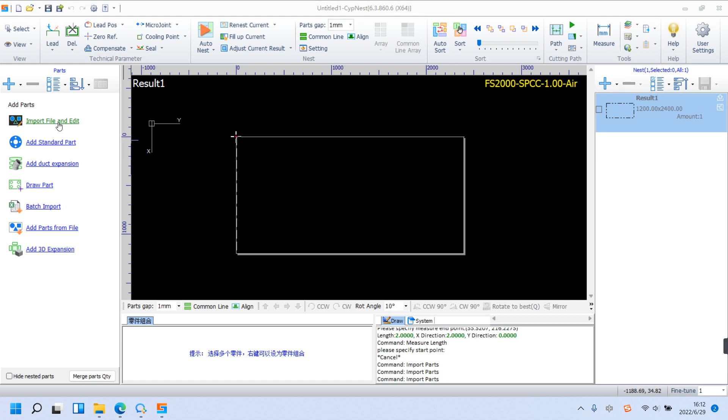Here is where we deal with files. DWG, DXF, LXD and LXDS formats are supported in CYPNEST. Mostly we import and edit parts, since we need to modify the drawing. And this is when parameters auto-optimization can be of use.

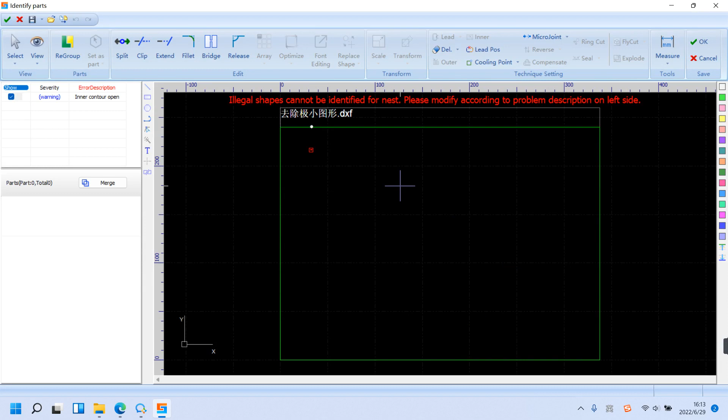Start without selecting this feature. Import the file, and we find there is a trivial line, which is, let's see, 2 millimeters long. And so we can quickly remove the unwanted line by selecting the feature as we import the file.

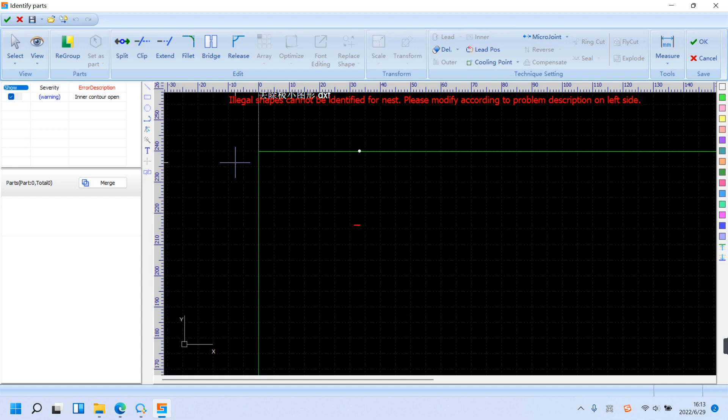So let's import the file again. Get it selected and set the trivial size as 2.1 millimeters. And it's gone. Even if sometimes they are too small to be found, checking this feature will leave you no worries. And for your information, when the file is imported with no errors identified, it will automatically turn into parts.

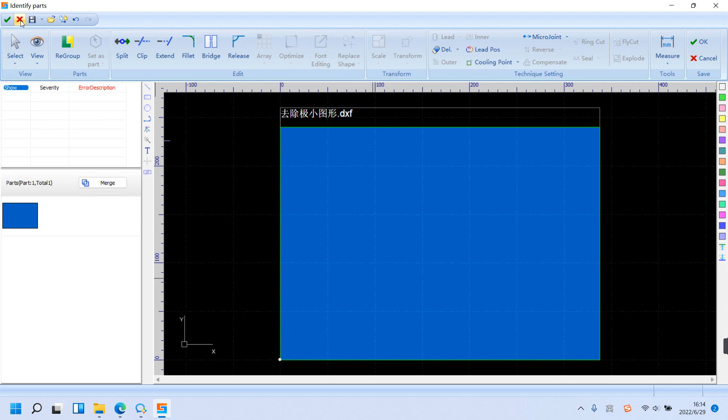The second part is mapping, which includes 3 functions: mapping by color, by layer, and their mixture. And here we also have graph replace. Generally speaking, parts have different ways to get processed. They can be distinguished by color or by layer. Let's take by color.

At first, we import parts, choose mapping by color, without any changes on how it is processed. We get a part with 2 rings to be cut, and here we also have a square. And now we import the same part again.

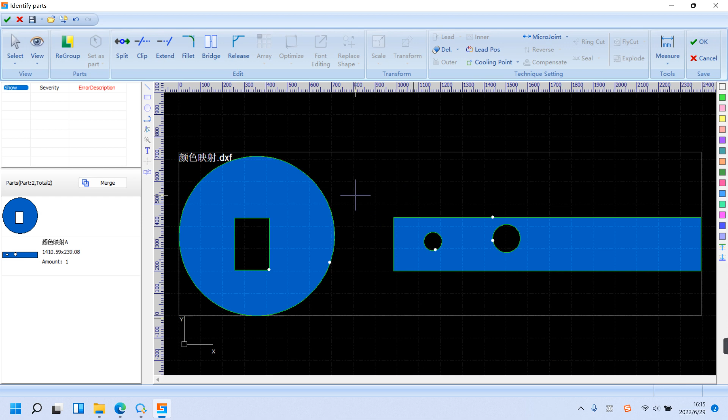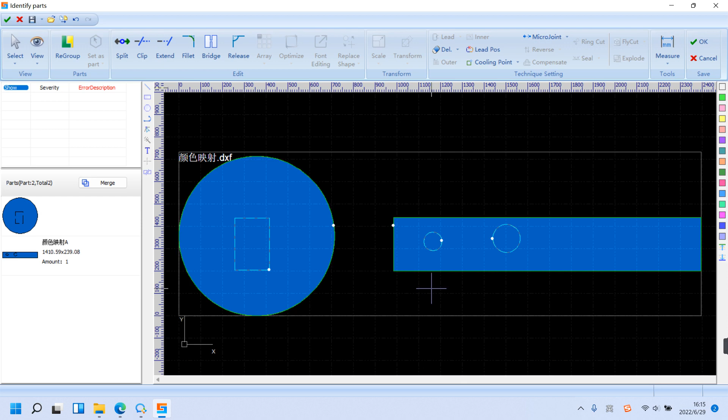With the red color set as marking. See, we got a part with rings to be cut and the square to be marked. This is how it works. The next is graph replace.

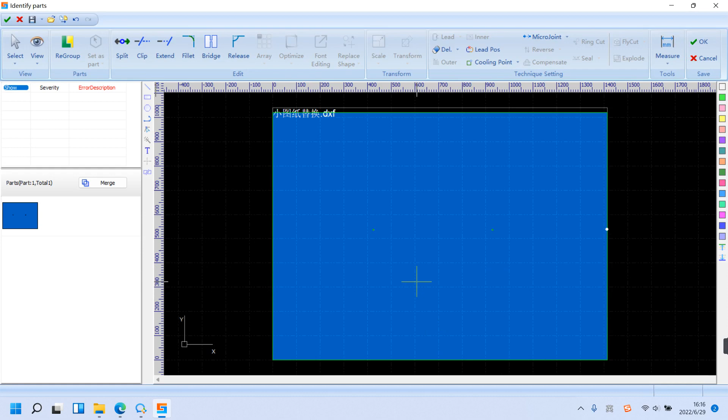In drawings, figures like small circles often represent certain marks. Also, we start with importing the file without graph replace. It's a square with 2 small circles, 10 in diameter. We will get a part exactly the same as its drawing. Then let's try this feature.

Auto replace small figures. The small circles are 10 mm in diameter, so the range should be at least 10. Let's replace them with little crosses. So the figure has changed, with 2 marking crosses on it. And let's proceed to the next feature.

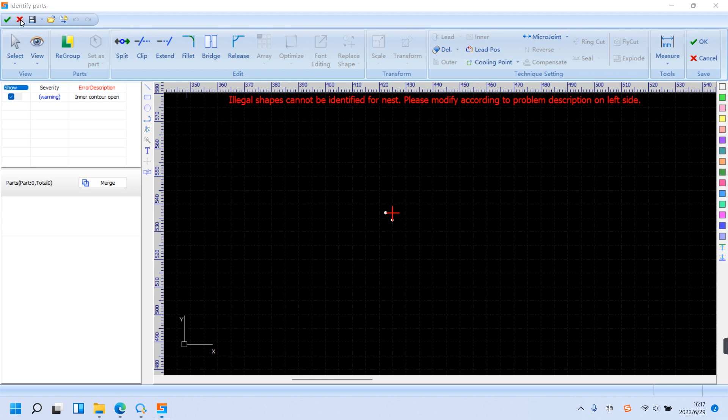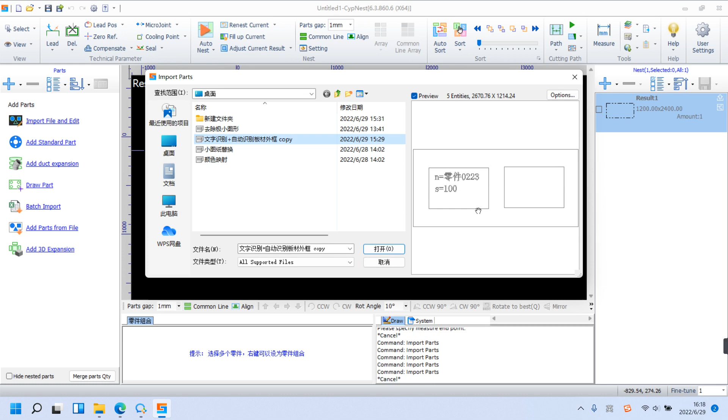The inside text identification. First of all, input text N equals part 0223 and S equals 100. N represents the part's name and S is the part's number. Input the information when we draw figures.

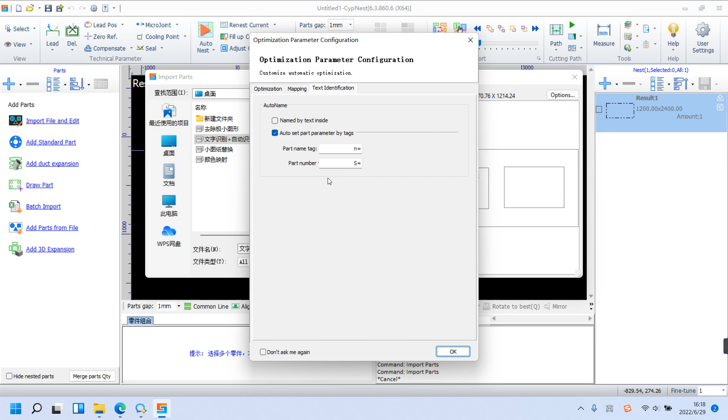And then we get this auto set part parameter by tags. Select it to input the letters that represent the name tag and number as we import the file. Now look, we got 100 parts named part 0223.

As we can tell, this feature will definitely bring us convenience in counting parts, especially when there are various kinds of them. We can do it in seconds, no worries about counting wrong. That's all about parameters auto-optimization.